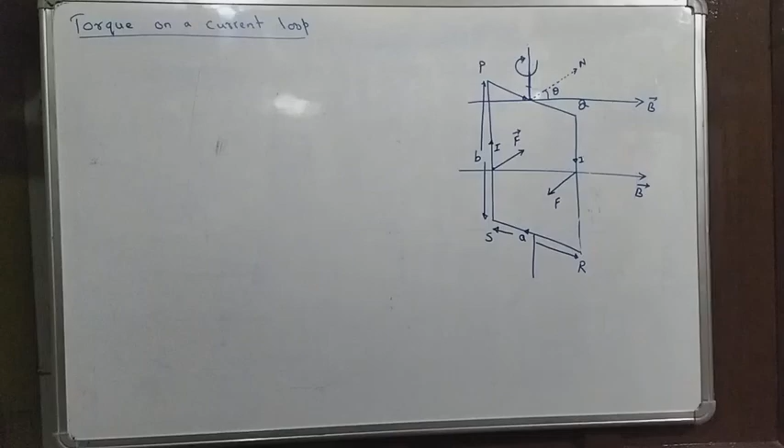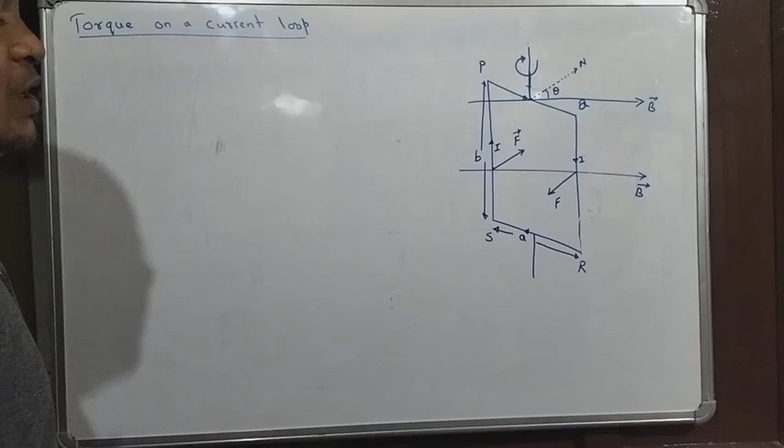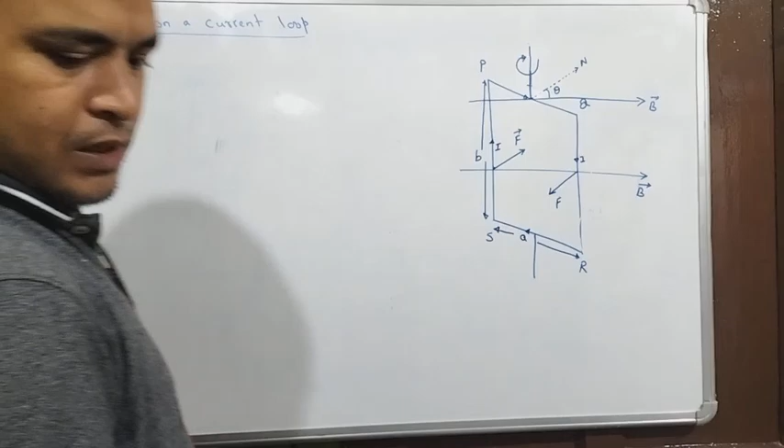Okay, student, here we shall see about the torque which is experienced by a current loop when placed in a uniform magnetic field. So as you can see here, this is a rectangular loop PQRS, and the current which is passing through this loop, let's say it is I. This current is flowing in a clockwise direction. Now this loop is placed in a uniform magnetic field B, which is acting from left to right.

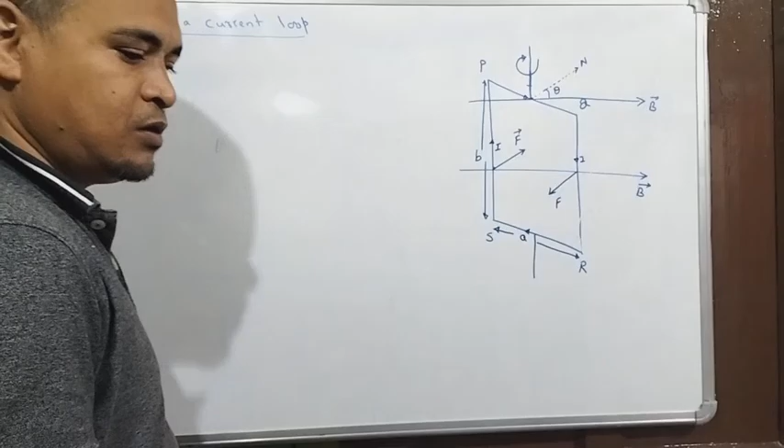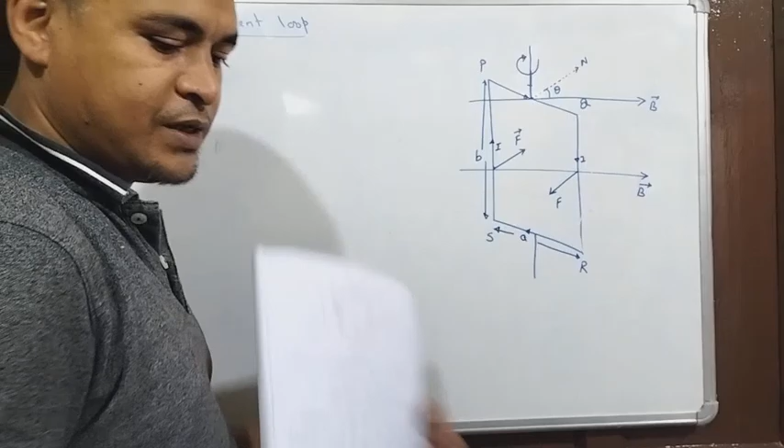All right, so if you remember, when we talk about area, any line drawn perpendicular to the area, like this line, means normal to the area. So in this case, the normal to the plane of the loop PQRS is this line, and this normal makes an angle theta with the field.

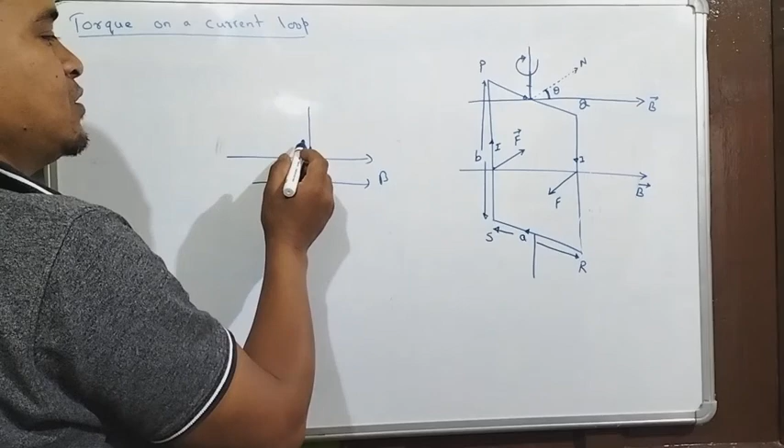Okay, so now what happened here is, because we have seen before that when a conductor is placed in a uniform magnetic field, and if there is a current passing through the conductor, then such conductor carrying current when placed in a magnetic field always experiences a force. So now in this rectangular loop PQRS, we have four sides of the loop.

We have four sides of the loop. One is side PQ, which carries a current in this direction. Next QR, next we have RS, next we have SP like this.

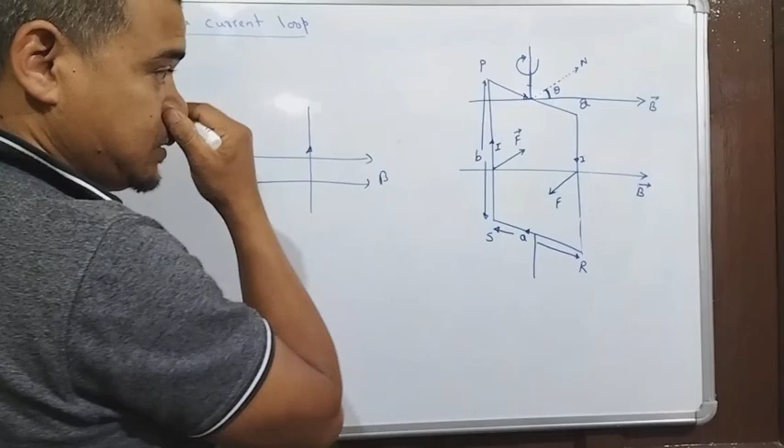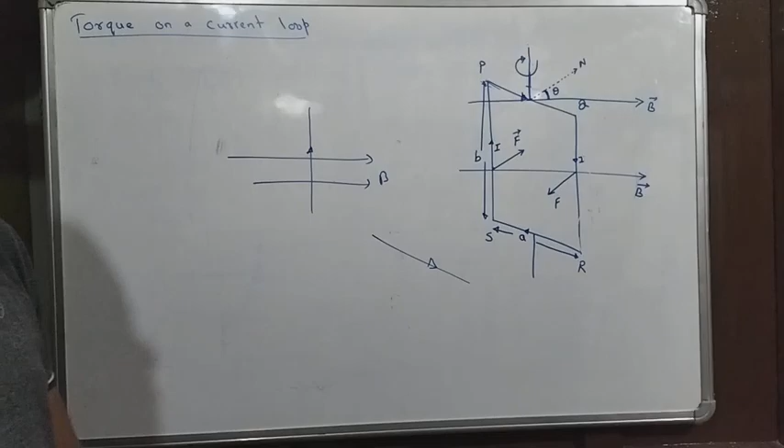So when we look at these two conductors, PQ and RS, the current along PQ is in this way. Now if this current I is passing in this direction, if you treat this side PQ of the loop as a single conductor carrying a current, then this side PQ will experience a force. But if you apply Fleming's left hand rule...

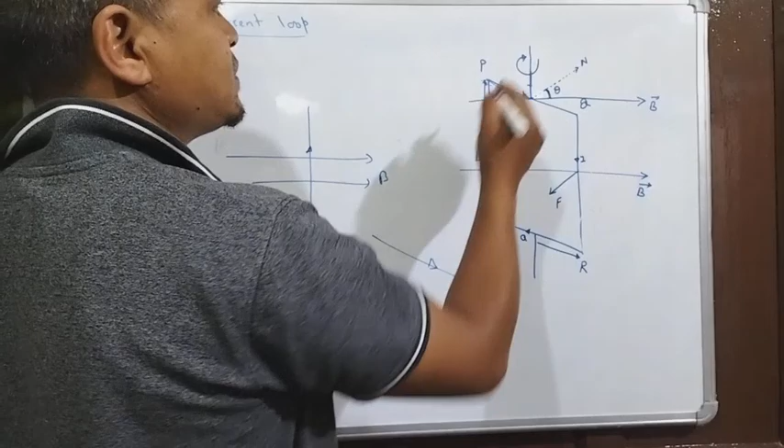Now the directions of the magnetic field are given by the forefinger of your left hand. The direction of current along PQ is along this side, and the thumb will give you the direction of the magnetic force. That means this side PQ will experience a magnetic force along this direction. Let's call this F1.

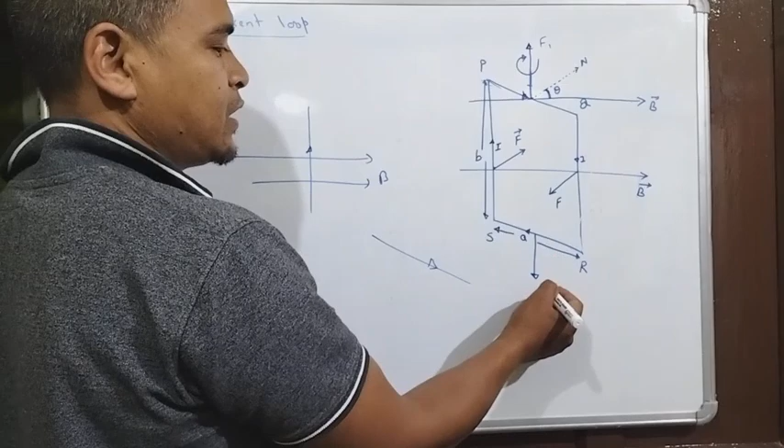Similarly, the side SR carries current along RS in this way. Now if you apply Fleming's left hand rule again, you will find that side RS experiences a magnetic force but in the downward direction. So let me name that F2.

So now these two forces, F1 and F2, they are acting along the same line. F1 is acting up, F2 is acting down. So these two forces are acting along the same line, and this line is actually the line of rotation, or we can say the axis of rotation of the loop.

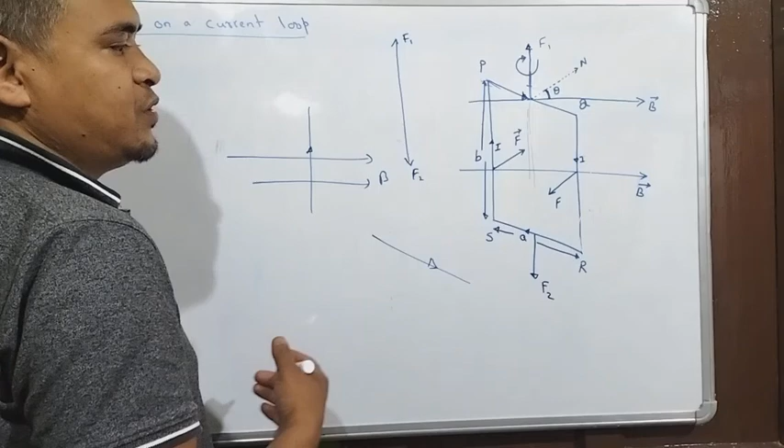Now such forces acting along the same line will not produce any torque, because torque is actually a rotating force which happens when two forces are acting at the two ends of the line in different directions.

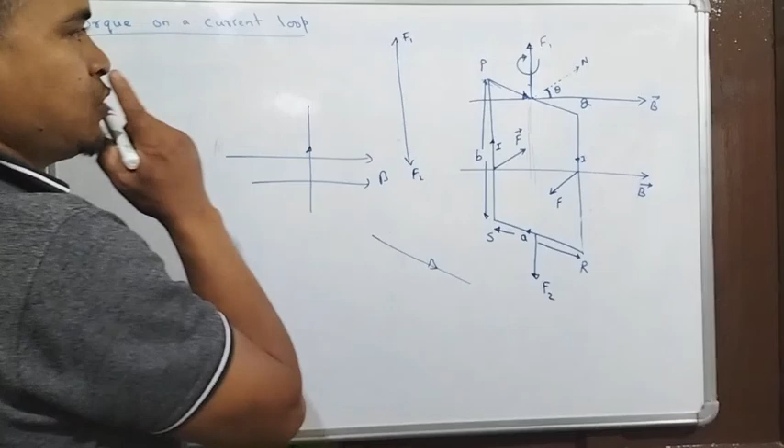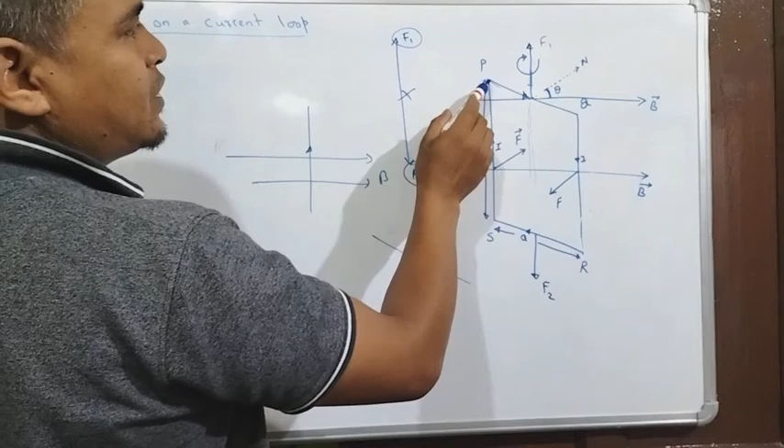So here what we found is the magnitude of the two forces F1 and F2 is the same, and the direction is different—one is up, another is down. So therefore these two forces will cancel out each other, and finally the sides PQ and RS of this rectangular loop will not experience any magnetic force.

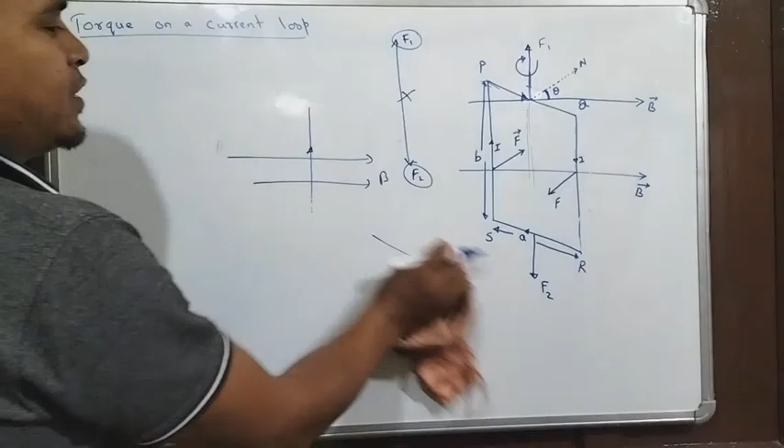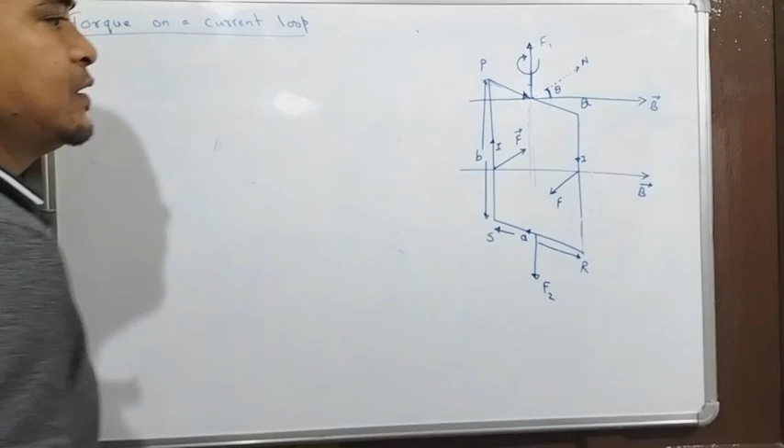Okay, now when we look at another side, SP and QR. The direction in side SP is acting up, right? So if you apply Fleming's left hand rule again, you get the direction of magnetic field, the direction of current is up, so the direction of magnetic force, represented by the thumb of the left hand, the force in this case will be directed inward.

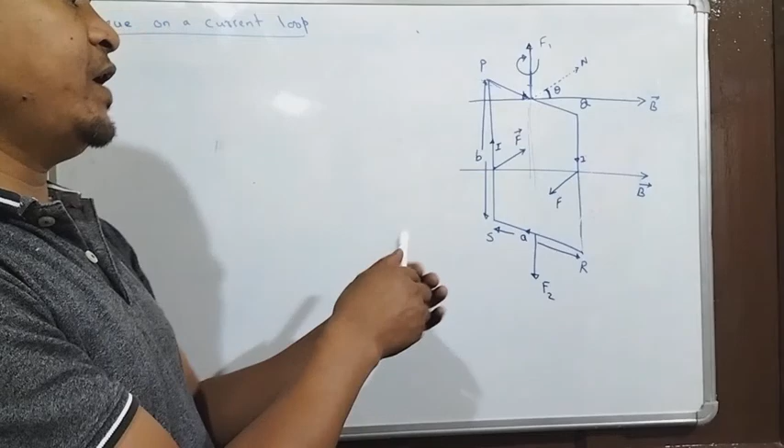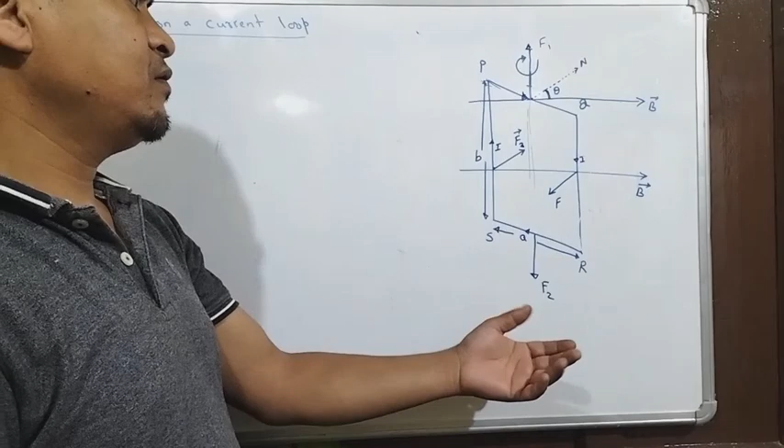So that means this side of the loop will experience an inward force, and I will name that force F3. The side QR carries a current in the downward direction.

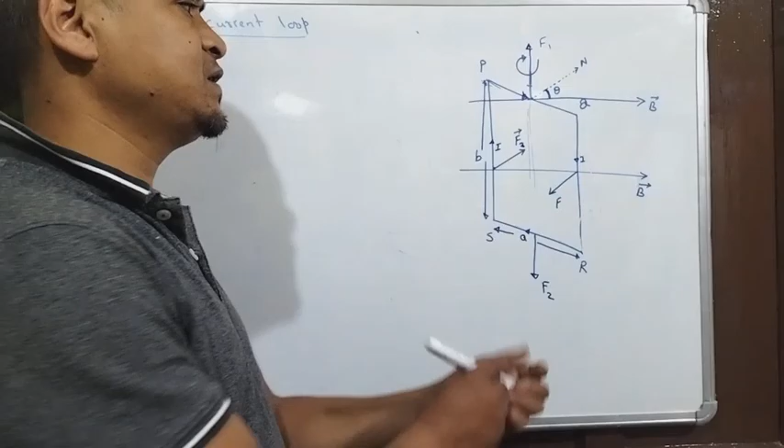So again, by Fleming's left hand rule, this side QR will experience a force, but this force is directed outward, perpendicular to the plane. I'll name this force as F4.

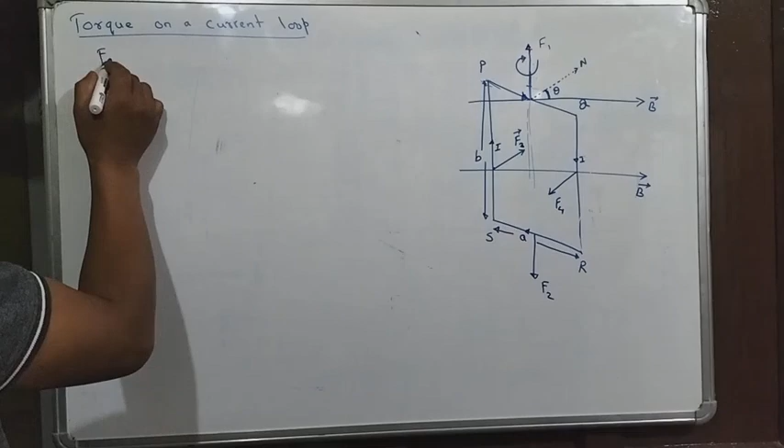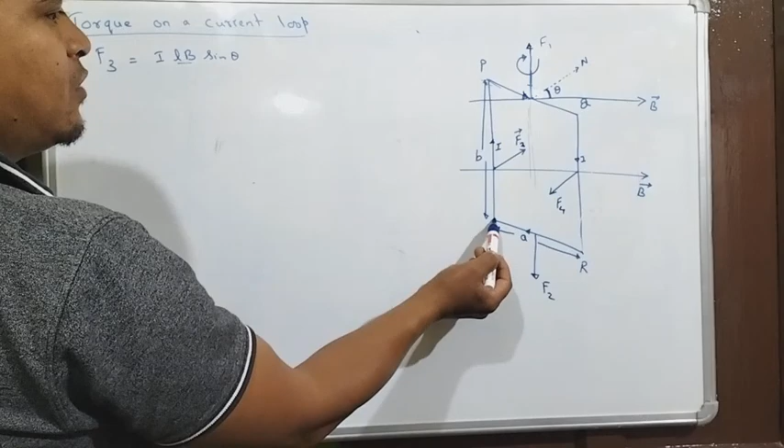Now what is the magnitude of these forces? F3, if you remember the force experienced by a conductor when placed in a uniform magnetic field, it is equals to ILB sine theta, where theta in this case is the angle between L and B. So the angle between, when you look at this conductor SP, the angle between L along this side SP, and B, it is from left to right, so the angle is 90 degrees, so sine 90 will be 1. So you'll have only ILB.

Now what is this L for the side SP? L for the side SP, it is equals to, I assume here to be b. So this is the magnitude of the force F3. Similarly, the magnitude of the force F4, it is equals to IbB.

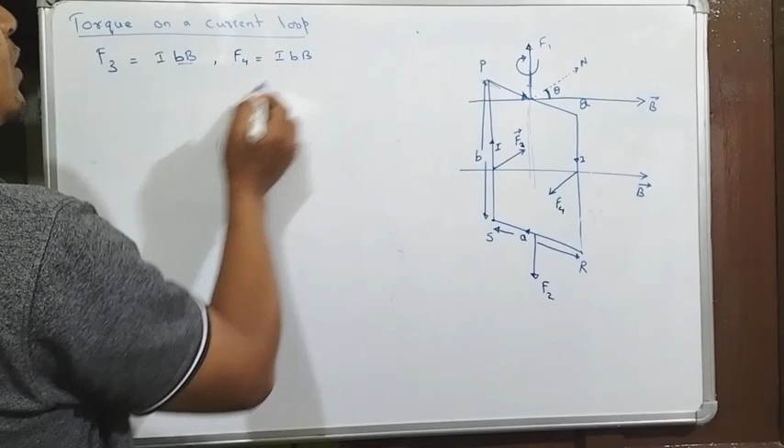Now these two forces are equal in magnitude but opposite in direction. Not just that, when you look at the line of action of these two forces, one force is acting in this way. Let's say this is force F3 and this is force F4. Now these two forces are acting along these sides. If you join them, something like this, so along this line.

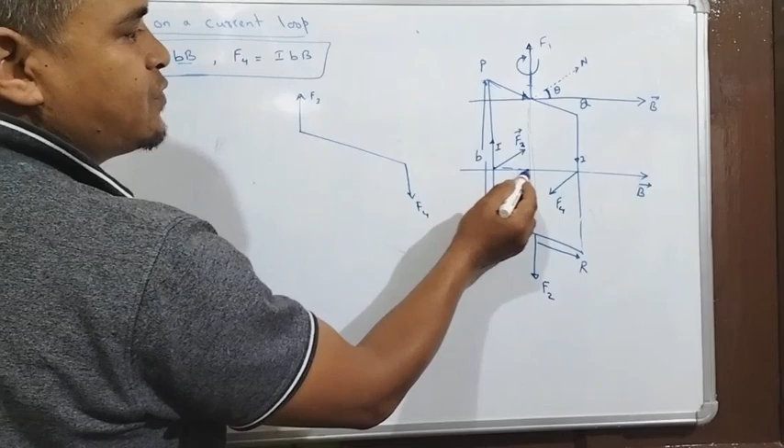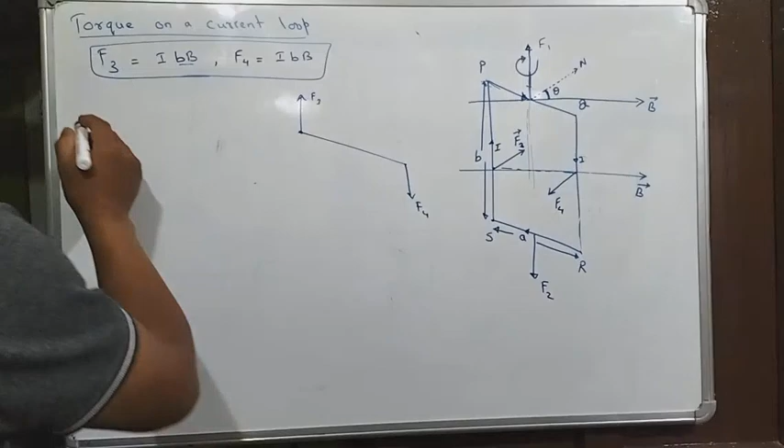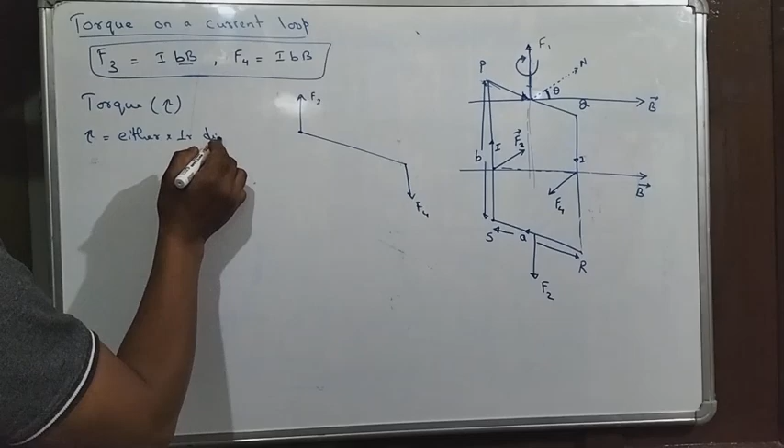Now these two forces acting at the two ends of the line in opposite directions, so they will constitute what we call a torque. This torque is denoted by the letter tau, which is a Greek symbol, and it is defined as the force times the perpendicular distance between them.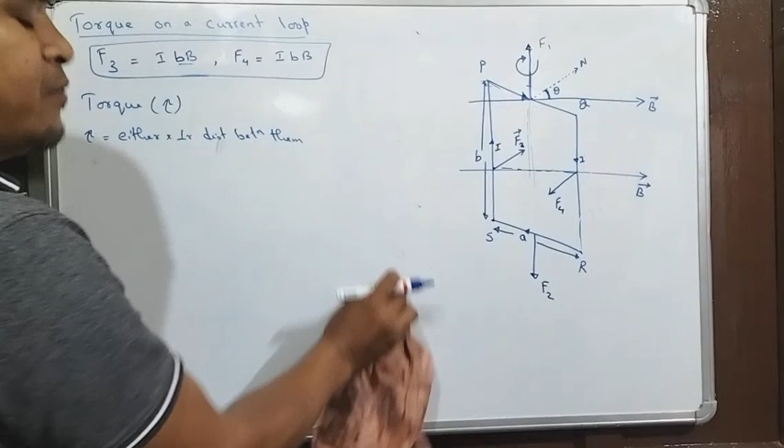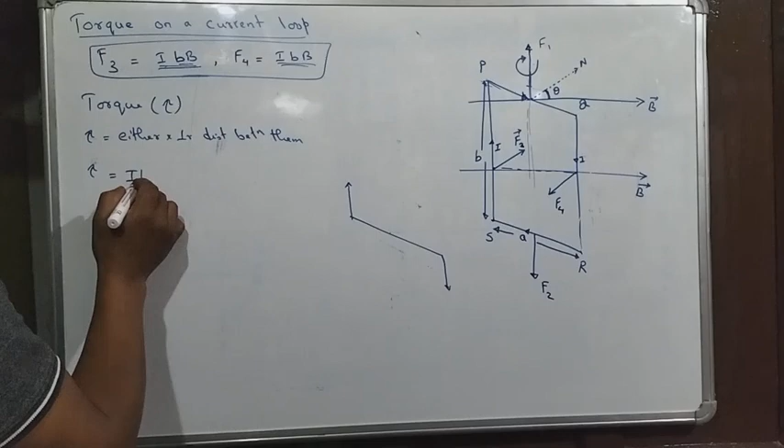Now when I say either force, it means you can write either the force F3 or F4. So tau here, when I say either force, it may be, the magnitude is the same. If you write F3, it is IBB. If you write F4, it is IBB. So same thing. So the magnitude of either force is I b capital B times the perpendicular distance between the two forces.

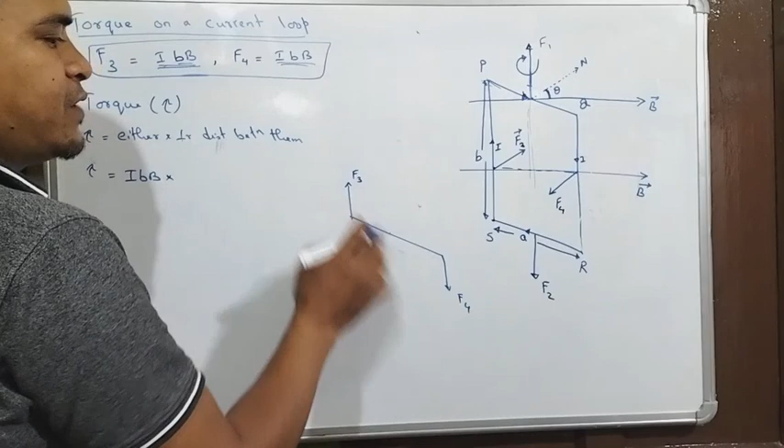Now what is the perpendicular distance between these two forces F3 and F4? When I say perpendicular distance, it means from this point, if you drop a line in this way, and from here also you drop a line in this way, such that the two lines intersect perpendicularly at this point. Suppose I'll name this as point M. Let's say this is A, this is B. Now this side AB here means this side from here to here. So from here to here, it is actually the side small a.

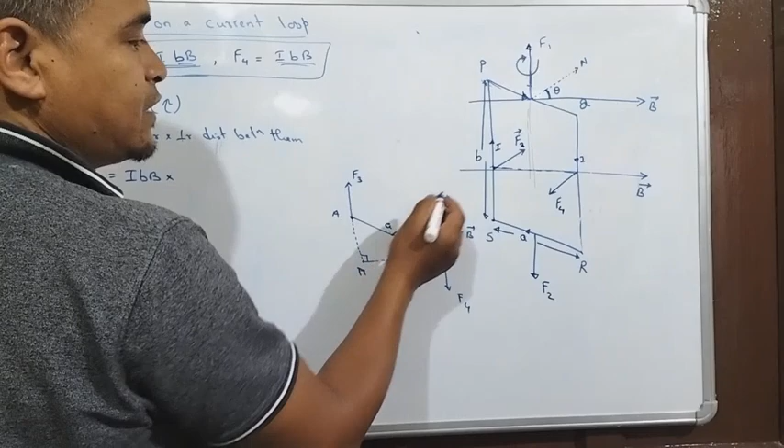At the same time, this is the direction of the magnetic field B. And this small n, I mean capital N, which is normal to the area, is acting in this direction, and this angle is theta. So when this angle is theta, you can also say that this angle is theta.

So now what is the perpendicular distance between the two forces F3 and F4? The perpendicular distance between these two forces, one force is like this, one force is like this, so perpendicular distance means this line. So in this case it is MB. So now how much is MB?

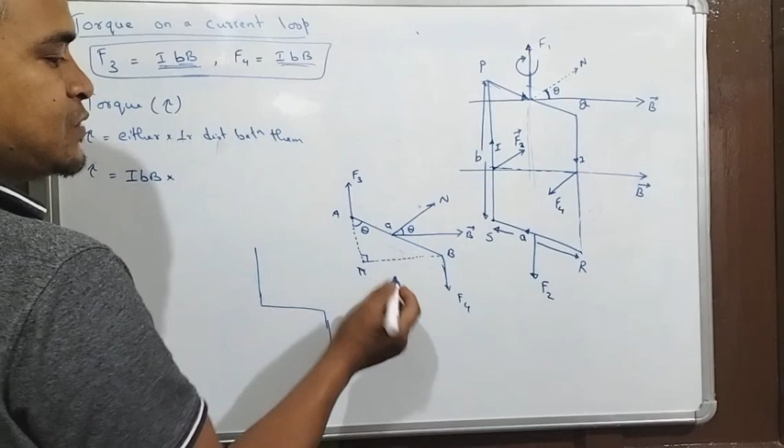MB here is equals to A sine theta. If you find out sine theta in this right angle triangle, then you'll get MB equals to A sine theta. So because of that, the perpendicular distance between the two forces, which is actually equals to MB, so tau is equals to I b capital B, instead of MB, I'll write A sine theta.

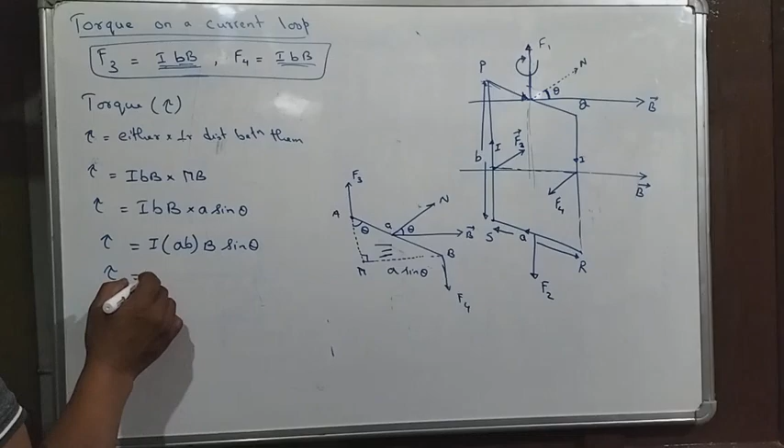Or this tau here is equals to I. Now I will rearrange the term AB. I'll put them inside a bracket, and then write B, and then sine theta. Or tau here is equals to I. Now what is this small a into small b?

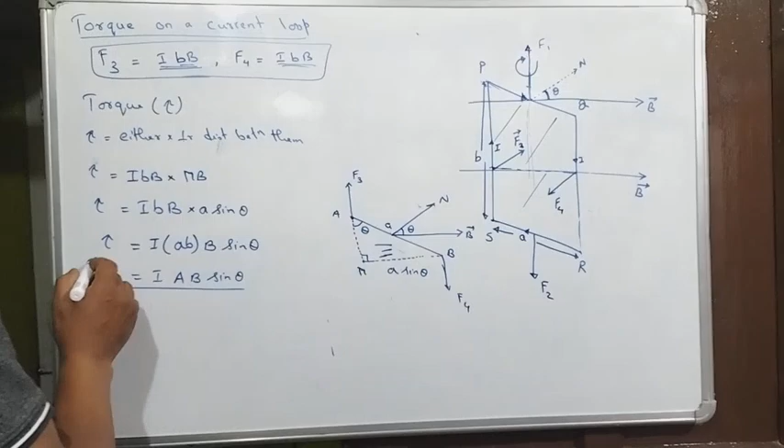A into B, it is the area of the rectangular loop. So for that area, let me write it as capital A. So IAB sine theta. Okay, so this is the magnitude of the torque which is experienced by a rectangular loop PQRS when placed in a uniform magnetic field B.

Now, if this loop PQRS has n number of turns, what will happen? This torque can be written as n times IAB sine theta. So this is the expression when there are n number of turns in the loop. Suppose this is my equation 1, this is my equation 2.

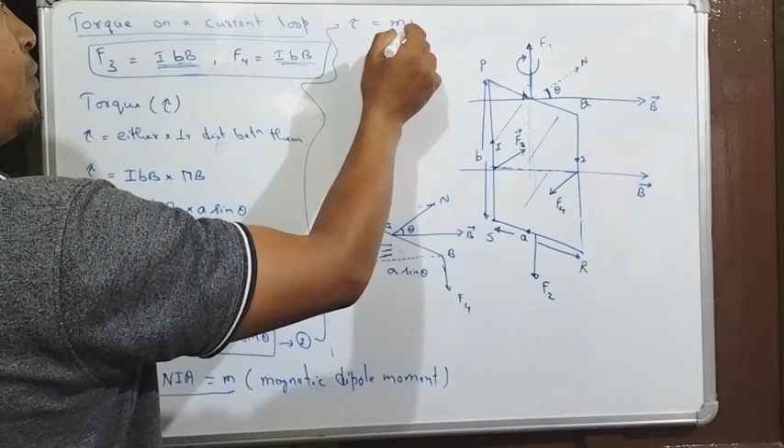But you will see later that this NIA is equal to small m, which we call it as magnetic dipole moment. We will see this later. So therefore, instead of NIA, I will write tau is equals to small m B sine theta. So this becomes the new equation for the torque experienced by a current loop.

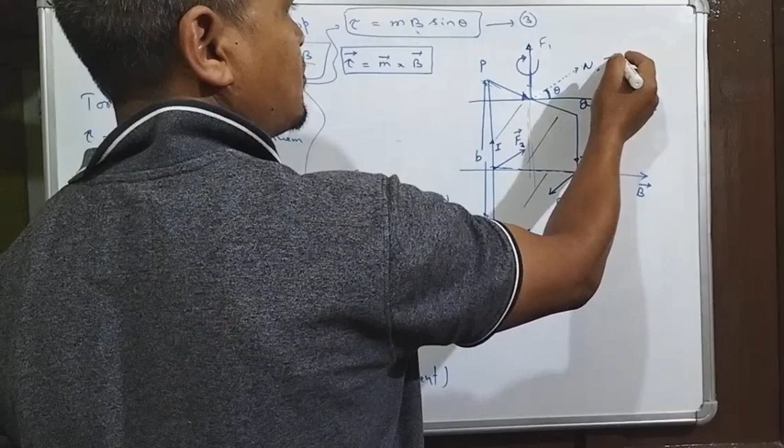Or in vector form, I'll write tau arrow is equals to m arrow cross B arrow. Because this tau is a vector, it means it has a direction, and the direction of this tau, it will rotate, or it should be perpendicular to the plane containing both m arrow and B arrow. Now the question is, where is the direction of this m arrow? This m arrow is actually along the same direction as the normal to the plane of the loop. I think this is clear to you, right?

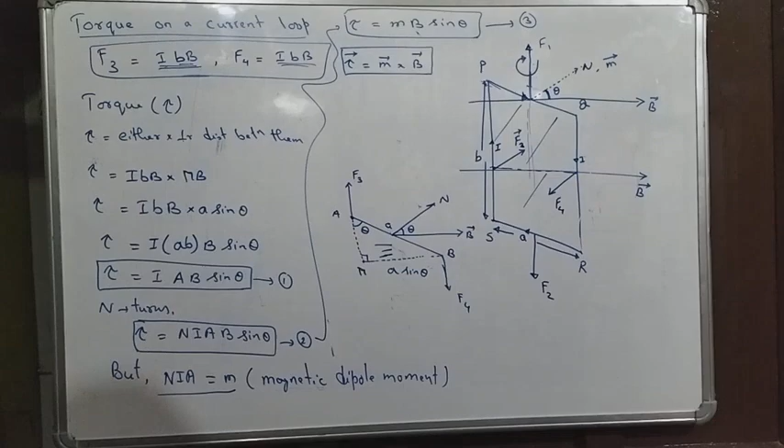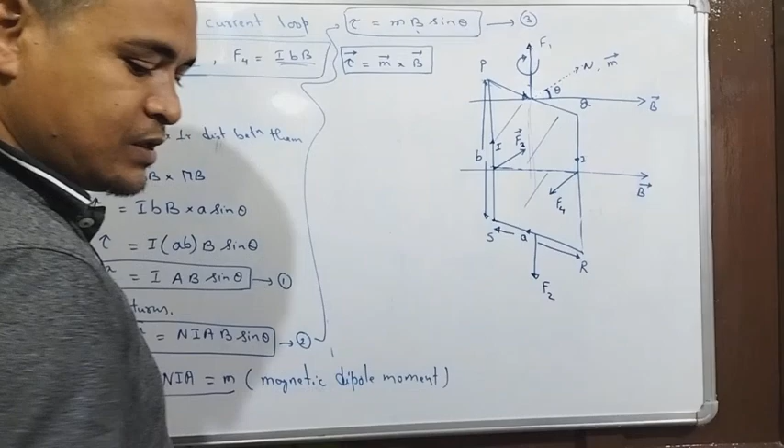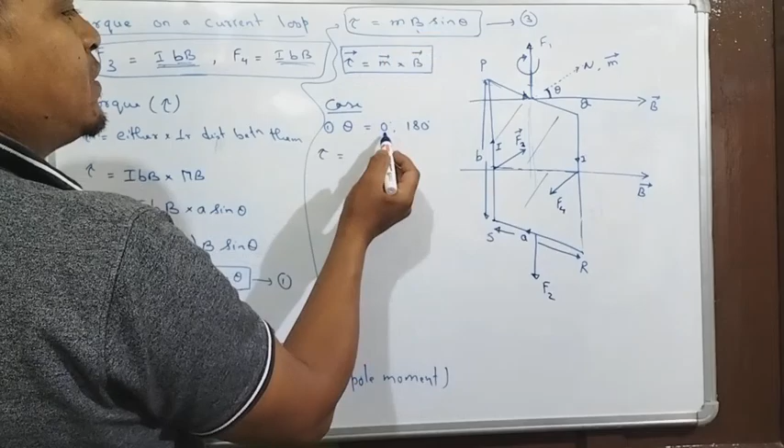Now we shall see a special case from this topic. Case number 1 is when theta is equal to 0 degree or 180 degree. So looking at equation number 3, tau is equals to mB sine theta. When theta is 0, sine 0 is 0. If you put sine 180 also, sine 180 is 0. So tau is equal to 0.

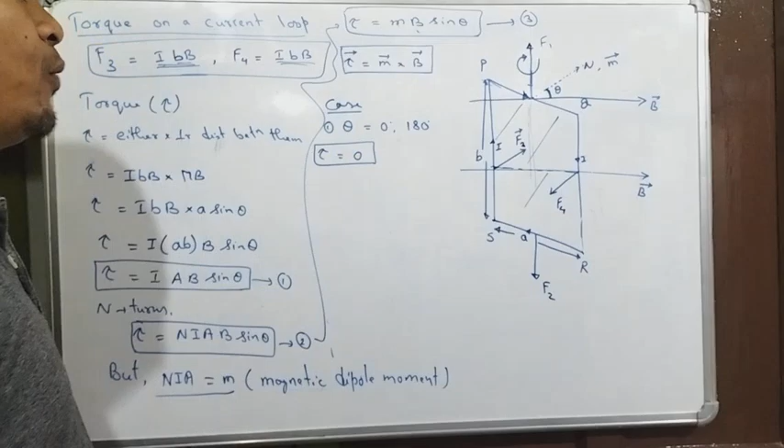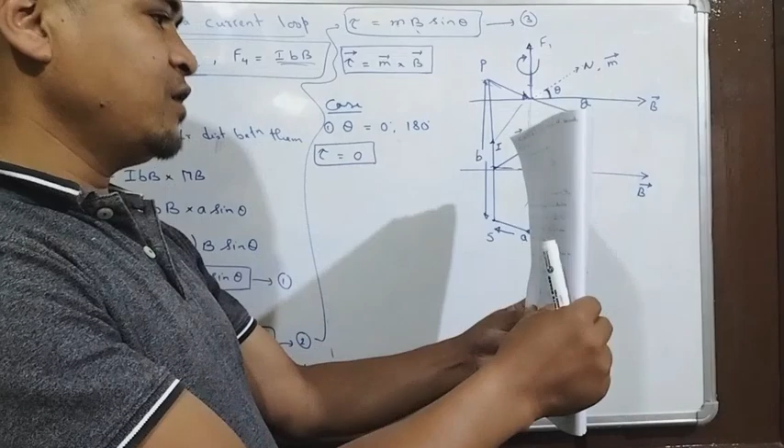So what does it mean? It means that when theta equals 0, the normal to the plane of the loop is acting along the same direction as the magnetic field. This is the normal, and the magnetic field is also acting along the same direction, so theta is 0 degree. Or when the normal is acting like this but the magnetic field is opposite to that, the angle between them is 180. So in such cases, when the plane of the loop is perpendicular to the magnetic field, that loop will not experience any torque, which means the loop will not rotate.

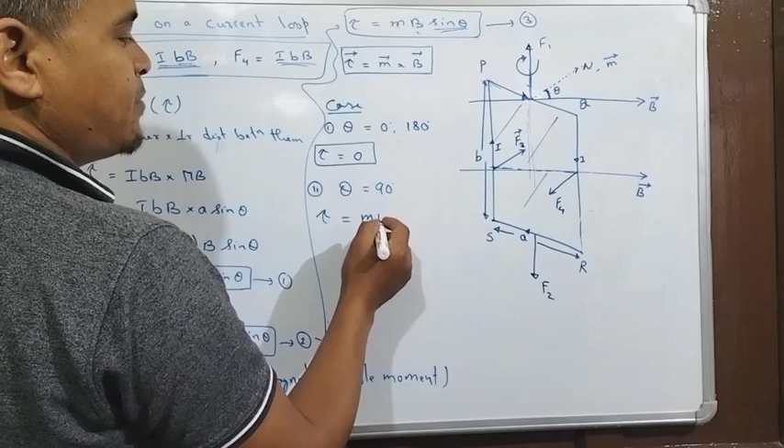Case number 2: when theta is equal to 90 degrees, then again from equation 3 you will get tau is equals to mB sine 90. But we know sine 90 is 1, so 1 times mB will just be mB. And this is known as the maximum value of the torque.

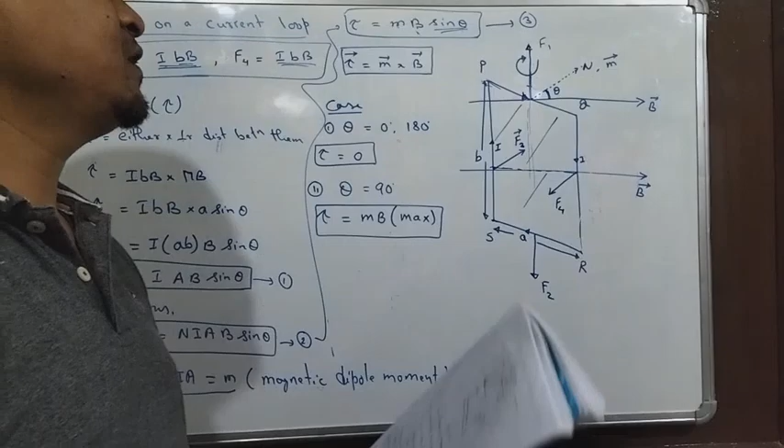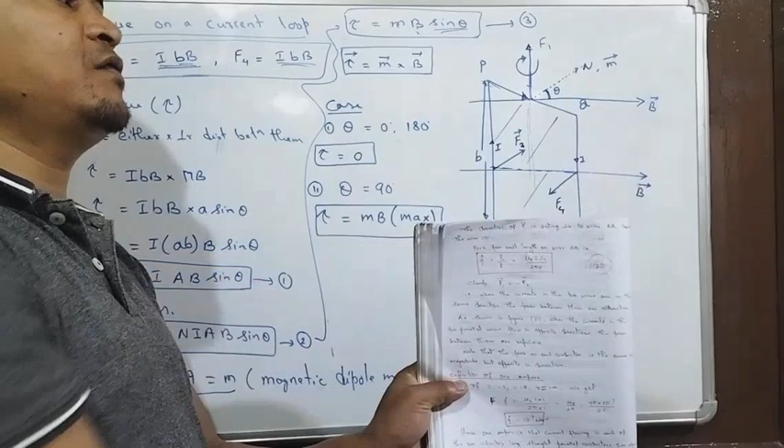In other words, when theta is 90 degrees, it means the normal of the loop is facing that side, so the plane of the loop is like this. The normal is acting in this way and the magnetic field is this way, so the angle between the normal and the magnetic field is 90 degrees. In such a case, this loop will experience maximum torque, which means the loop will rotate maximum, and it will rotate in this way. So the rotation of the loop in this case will be in the clockwise direction.

So please remember this point: I'll just remind you quickly that when a current loop is placed in a magnetic field, that current loop always experiences a magnetic torque, which means the loop will rotate in the magnetic field in the clockwise direction.